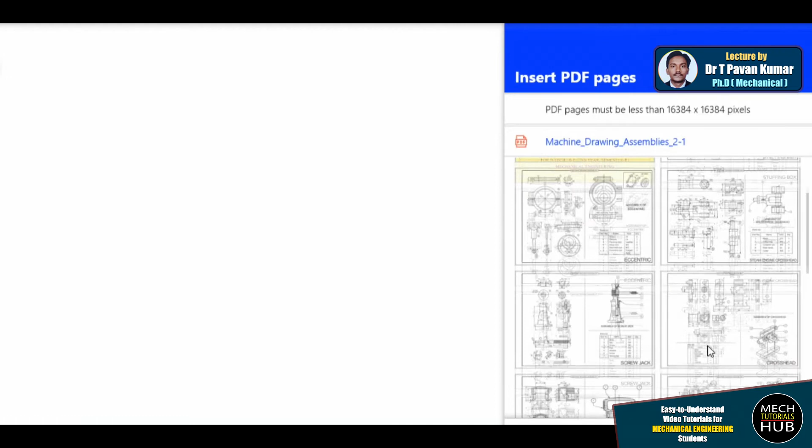Now let me quickly move on to revolving center. I'll take that question first. This is that question. We have already discussed, I have shown you the 3D representation of the model, and also how to accommodate the parts, or how to place the parts in its working position. All the discussion we had already.

Now here is your question. This is the question. Complete question will be given to you with all the representations and all the dimensions. You are supposed to assemble them. Part list table will also be given to you. Now where to start, how to start is a question. Today we'll discuss and focus on that.

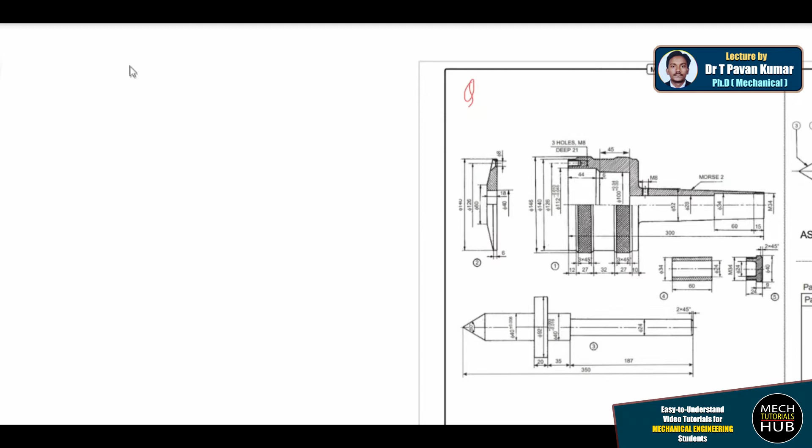Now let me tell you, whenever you start any assembly or any drawing, whether it is an assembly or an individual part, you are supposed to use 2H pencil all the time for construction. 2H pencil for construction. That is very much important to understand.

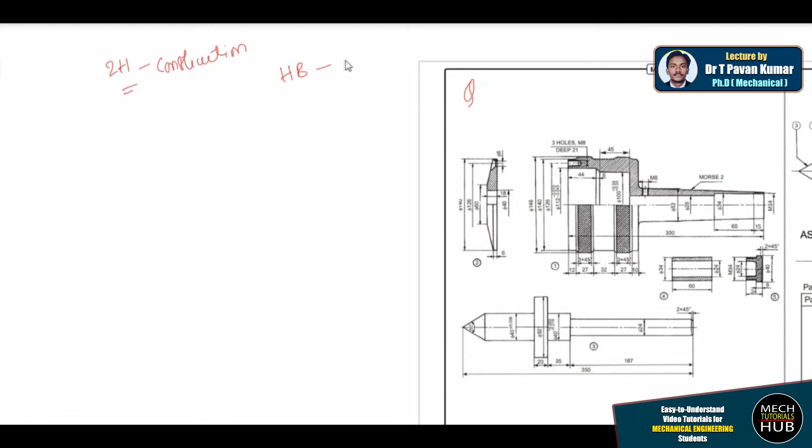Other than this, HB pencil is used to darken the outer profile or the visible portion. Only the visible portion you have to darken. To draw the continuous lines we use HB pencil, and complete construction, dimensions, everything we do with 2H pencil. That is what I'll show now.

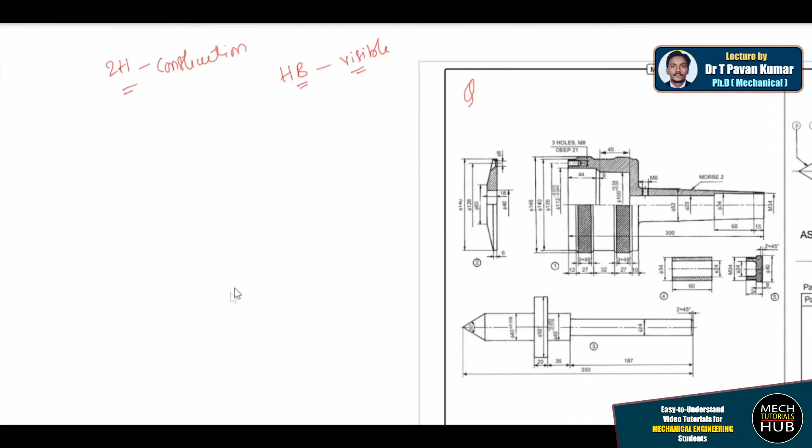Try to concentrate. Now let me consider this light color as the construction, and let me use a scale for this session. Two points are very much important. Number one, you have to consider whether the given assembly is symmetrical with respect to horizontal or with respect to vertical. These two things you have to keep in mind.

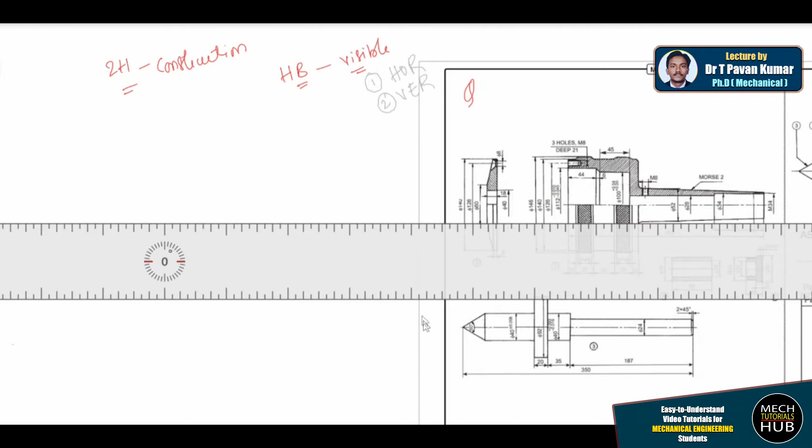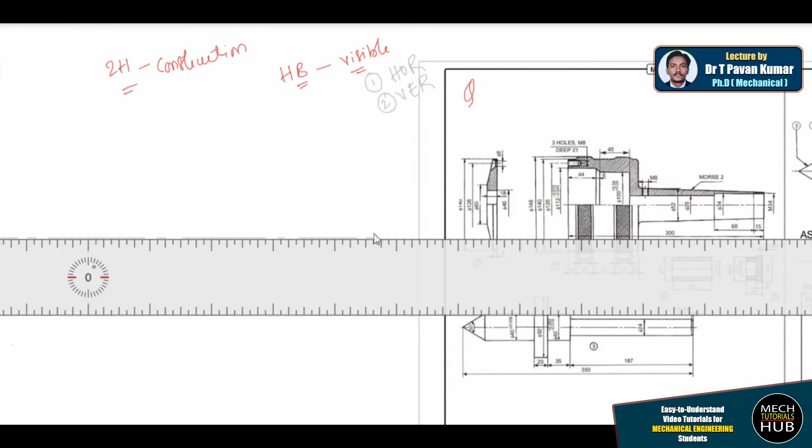Now this component is symmetrical with respect to horizontal, nothing but the top half is equivalent to the bottom half. So what I'll try to do is draw one axis line. I'll consider one axis line here where I just try to build the complete construction of revolving center. Alright, this is the axis line. Now to this axis line, whatever the axis line I have drawn, that is this particular axis line.

Centrally, now this is part number 1. The second thumb rule is, whatever the assembly may be, try to place part number 1 first on your drawing sheet, properly with all the given dimensions. Now to place this part number 1, let me read all the dimensions.

The overall length is 300 mm. Let me take this color. Overall length is 300 mm and having a minimum outer diameter of 34, here you could see, and a major diameter of 146. This 146 is from extreme end points, and there is one more diameter called 140, that is one more line parallel to that, and there is a circular hole of 8 mm diameter here, which is at a distance of 126.

Just go through the sketch properly. I just consider outer dimensions. Length is 300, 34 is the minimum dia, 146 is the major dia, and there is one more width here, because this 34 is not maintained throughout. There is one more diameter which is 52. There is a taper here from 52 to 34. I'll show you how to draw each and every bit of it.

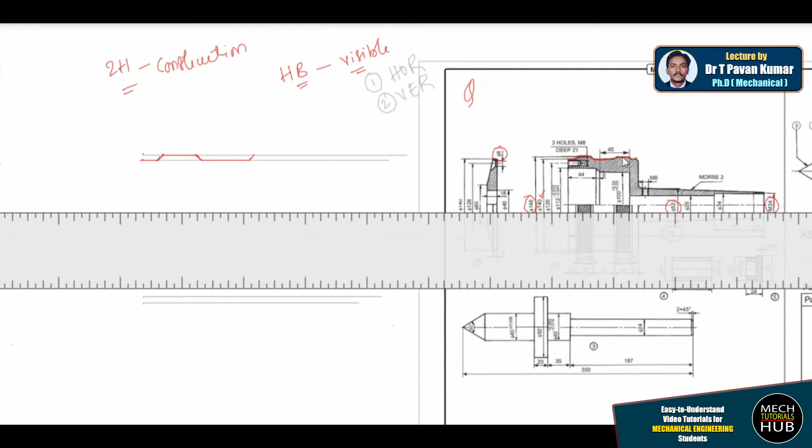And here 45 degrees. Again I'll go with one more distance. This is again 27. Let me place the scale here. This length should be equal to this length, and now 45 degrees to the below side, bottom.

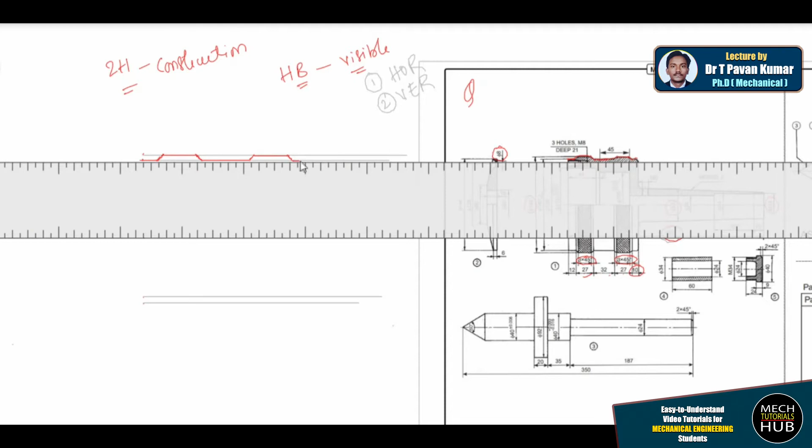This is fine. Again there is a horizontal of 10 mm, that I'll try to draw. This is 10. Alright, now the same profile will be followed to the other side.

For that, you have to make proper use of construction pencil. Now I'll just make this scale vertical. Only this particular part number 1 will take enough time. Other parts will take very less time. Try to concentrate, we have only 7 minutes time for the session.

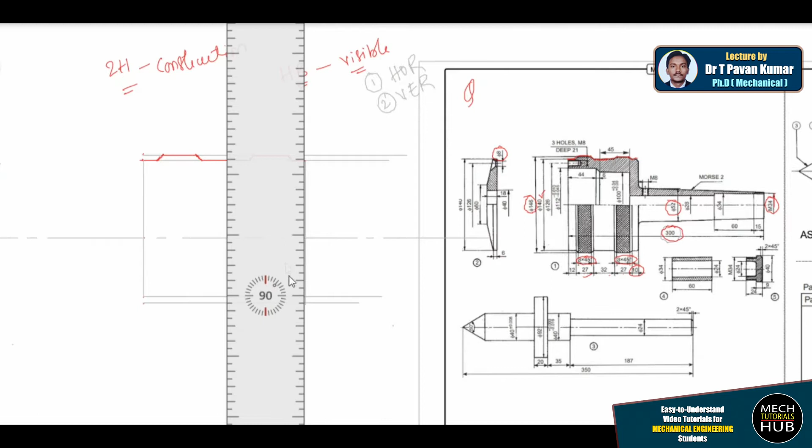Please try to rejoin. Now the part will start here. Wherever the part is going to start, there I am going to draw a vertical, and wherever it is going to end, there again I'll try to draw one more vertical. This complete width is going to fall in between these two verticals.

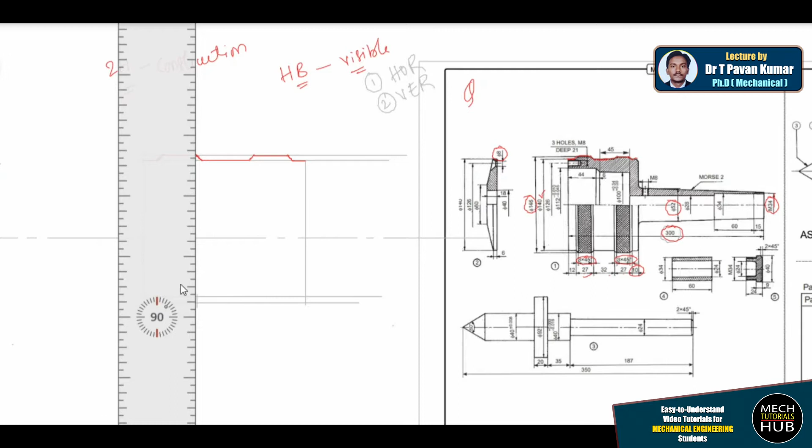Again same story, where I just need to draw the profile here to the bottom side also. For that, no need to draw the same process again, I just take the intersections. Here is one more, here is one more intersection, because these intersections will help you develop the sketch properly. No need to measure, simply take the intersections and you can easily develop the model, because ultimately I need to get that profile.

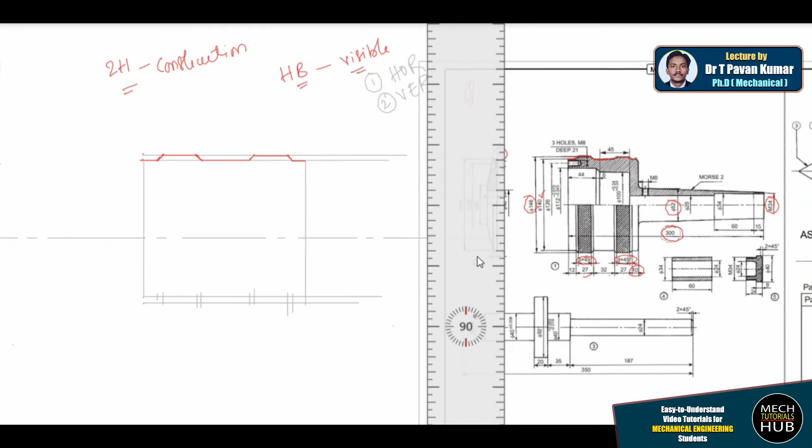And rotate the scale, keep it horizontal at 0 degrees. Now simply, wherever 45 degrees is required, there I'll try to put the 45. This red color one is nothing but your HB pencil. This is 45, this is also 45, 45 degrees, 45 degrees. Now in between I just need to darken the lines.

12, 27 lines, this is 32 line. Whatever the profile maintained above, same is going to be maintained here also. If you do the proper markings, then it becomes very simple. Whatever the profile made above, same thing I did here also, I got it. Now outer thing is fine.

Let the construction lines remain the same, or else if you feel some clumsiness, you can remove it. That is also okay, not at all a problem. Whenever you want, you can remove it. If it remains also, doesn't matter.

Now this is done. Now internally, if you could see, there is a profile followed. This is a horizontal 45, horizontal, then again a vertical line till the axis. So that I'll try to draw now.

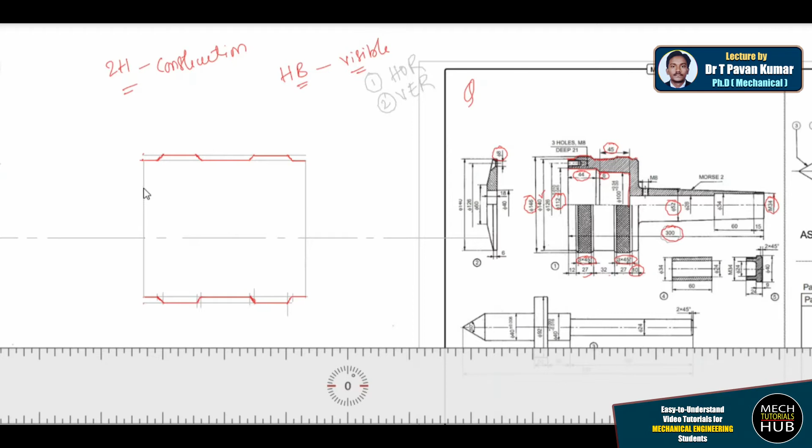Okay, from here I'll just need to draw a length of 44, which should cross this inclination. Keeping that in mind, I'm doing it.

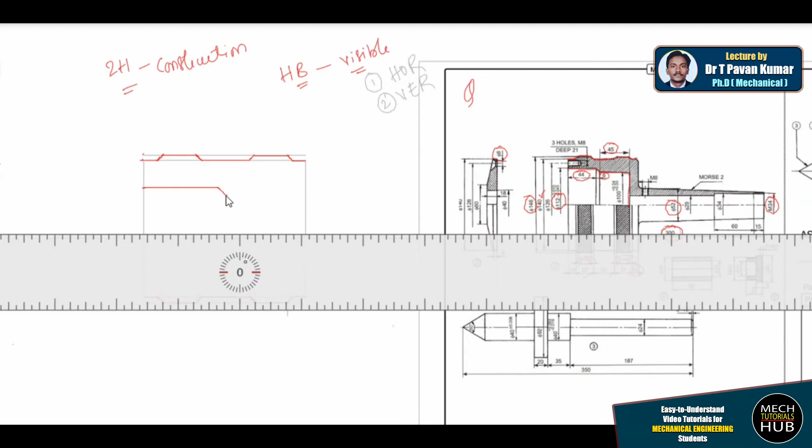This is 44. After that 44, there is a 6 mm gap. From this point I just need to make a mark of 6 mm and draw an inclination, 45 degrees inclination. From that 45 degree inclination, there is one more line of 45. From here I just need to draw that 45 line.

Till here it is fine. I just need to drop this line. We have to drop the line till the axis.

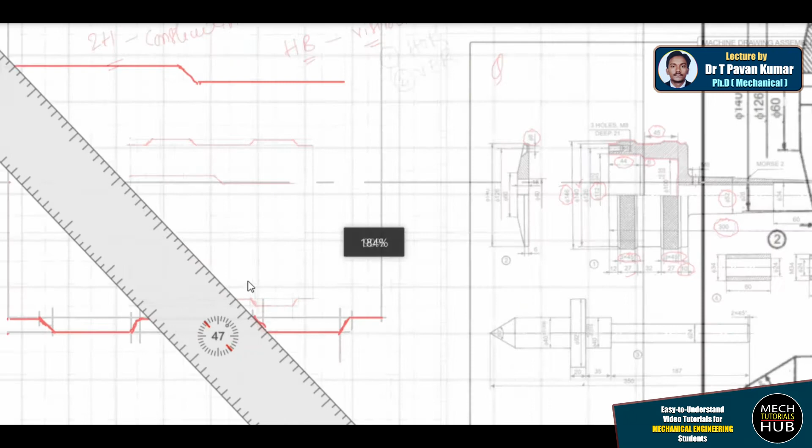Just have patience, I have enlarged this scale. Let me reduce further. Okay, now I'll try to make it 90 scale and place it here. Now have a look, I'm trying to get this line till this axis.

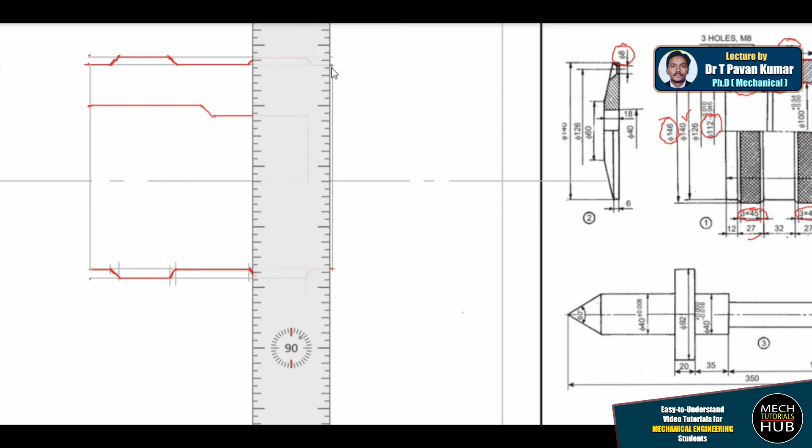I'll try to close this line also, since I already drew the vertical. This is also visible, so I'm making it dark. Till here it is fine. Okay, let me reduce the size.

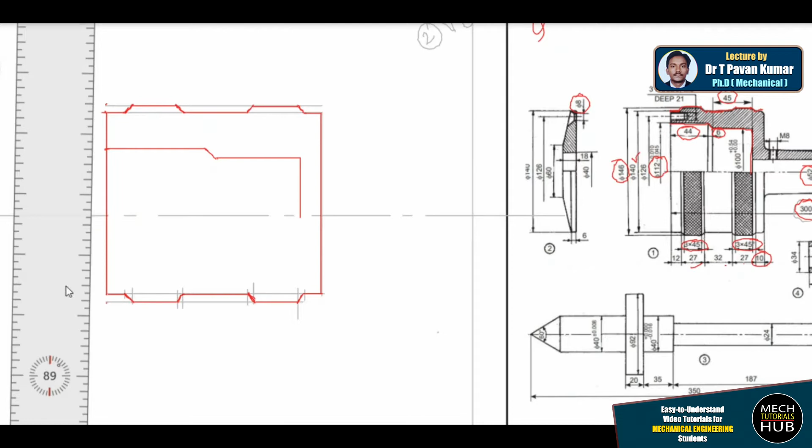So that I can show you in a better way.

Alright, now what exactly we need to do? Hatching part, now internal features you can mark. There is a centrally drilled hole here, which is at a distance of 126 from end to end.

From the center, if I consider 126 divided by 2, that's 63. So from the center I'll make a mark of 63, and there I'll place a hole of 8 mm diameter. So from the marking, 4 mm on either side.

Let me change the color. This is 4 mm and deep of 21, with this shape. There is a hole here, because this hole will help you clamp the cover, which is part number 2.

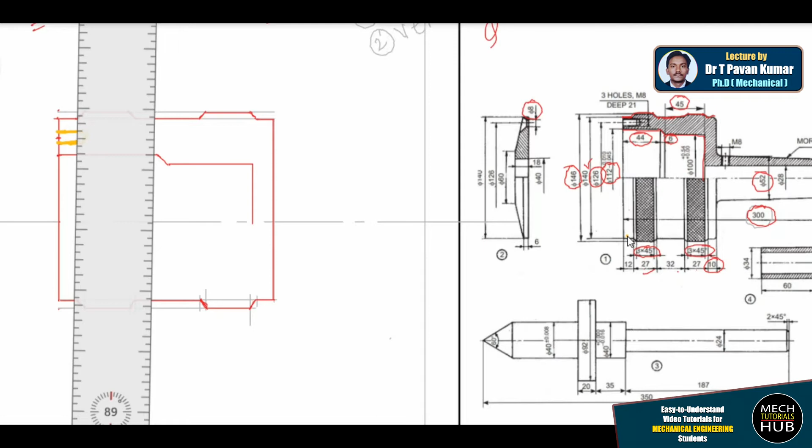Here, let me show you. Here you could see it is maintaining a diameter of 52.

Let me erase a few things and show you. Already these things I'll erase just to take off the clumsiness, and let me show you here. The diameter maintained is 52, and outer it is 34, and internally also there is 34 by 60.

Okay, and I just need to construct the leading edge of the barrel. That is also important. Let me do this by considering, because here there is a taper section from 52 to 34.

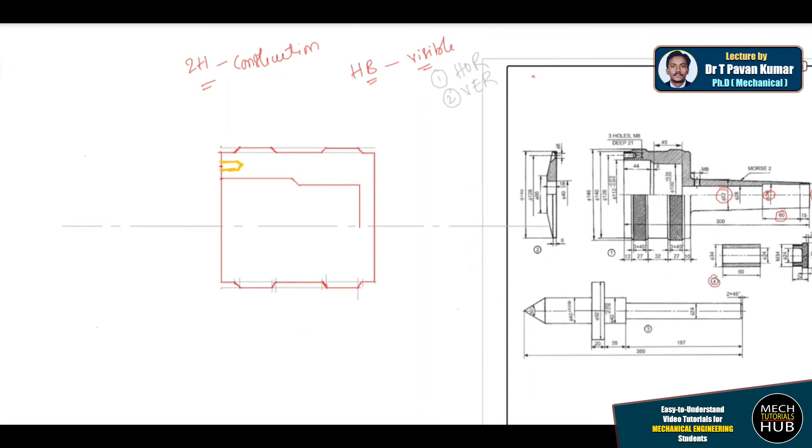Let me erase these unwanted things which I have explained you earlier, so that you could see the clarity of whatever construction we made.

Initially constructing with 2H pencil is very important. Try to understand, now what I'm trying to do, internal features, intricate shapes, that you can do just by looking at this hatching part. We need to maintain an angle of 45 degrees with an offset distance of 2 mm. That clarity you already have.

We'll see if time permits. Now I'm trying to draw this leading edge of the barrel, which is maintaining diameter of 52 here and outer diameter of 34.

And what is the length that we need to calculate? Length is also important. Overall length is 300 mm.

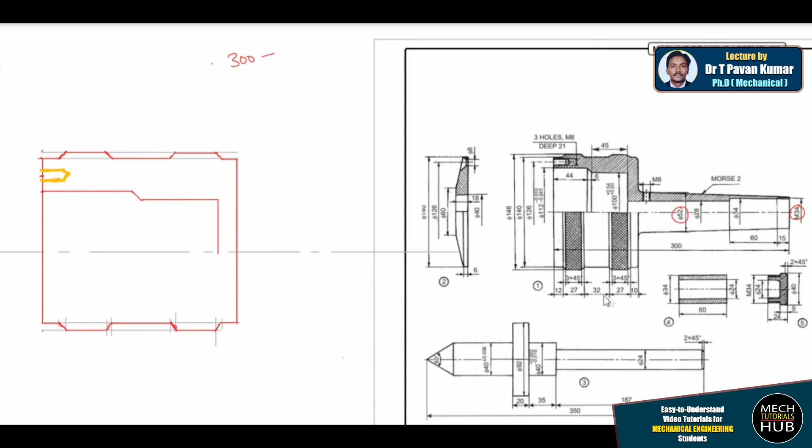Overall length is maintained as 300 minus this, which we have already constructed, that is 12 plus 27 plus 32 plus 27 plus 10, which is 108. I am going to subtract this 108 from 300, which gives you 192. That means from this vertical till the end it is maintaining 192 mm.

Okay, so now I need to construct that 192 here. So let me use these dimensions, 52. I make a mark of 52 from here, from this center. I need to split that 52 into 2, that's 26.

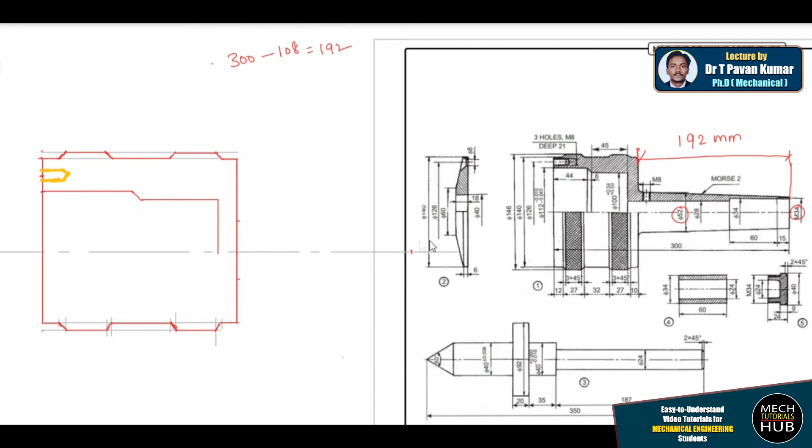So here, 26 on either side. Now I'll measure a distance of 192 from this point, till this point, 192. Alright, 190, or else better what I do is I'll just try to move. The whole thing is moving now.

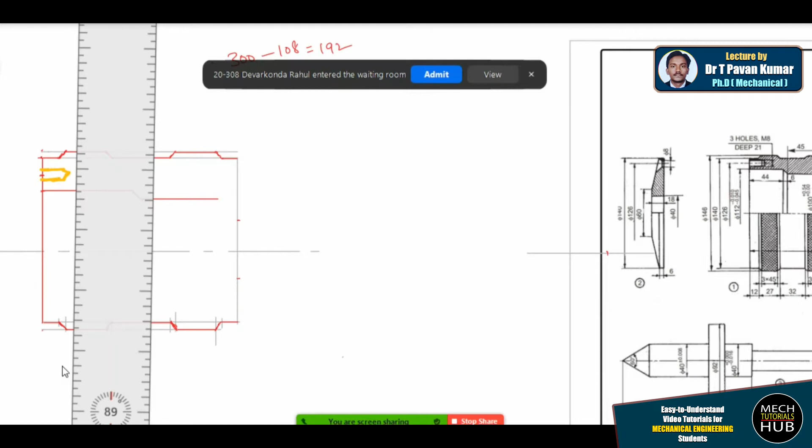Alright, I'll just try to redraw again so you'll get clarity, because the space available there is very less. So I have shifted the question back to its position, and I'll try to make it horizontal.

Let me draw the construction first by taking 2H color. I am increasing the axis length. This is done. Again I'll just try to make it vertical.

Then already we made marking of the 52. Let me change the color and draw. This is fine, and here there is one more line that needs to be extended. This is also okay. Now the 24 is done.

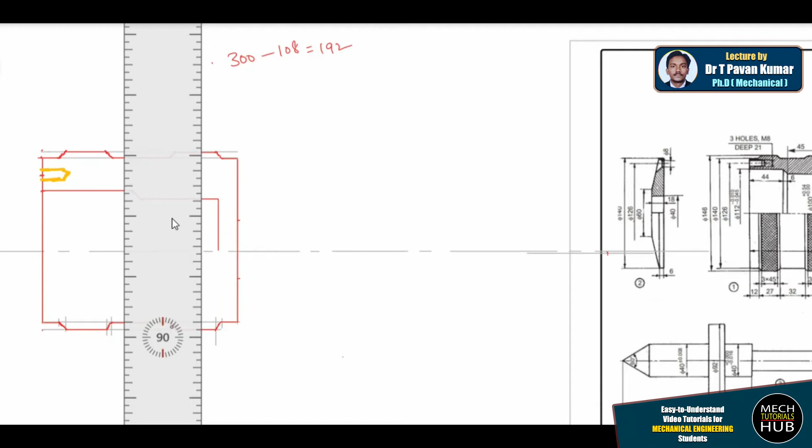Now I need to make a mark of 192, because 300 minus 108. 108 is already constructed, so I am subtracting to get this particular length. Let me consider this length and make a mark here. I'll consider this marking as 192.

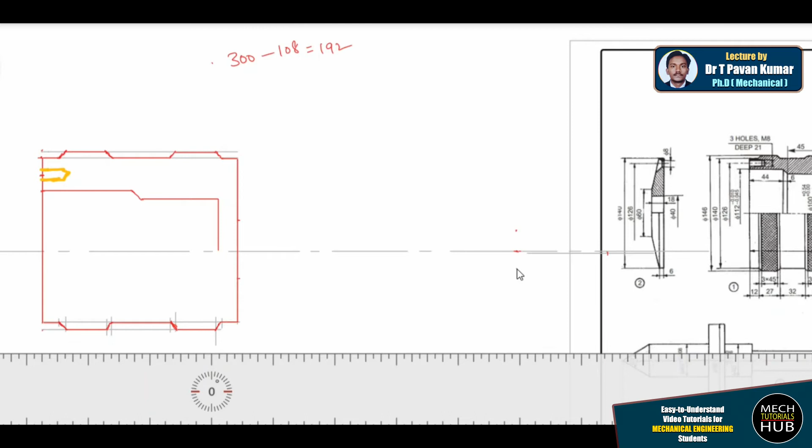Now here at 192 we need to place 34, which is 17. Sorry, from here I'll just make a mark of 17 on either side, this point and this point. Let us consider from this point to this point as 34. Now let me join those two with this scale.

Let me align this point, the 52 point and the 34 point. I am aligning those two, and let me draw a continuous line, a taper line you are going to get. Similarly to the other side, do the same practice. Rotate it down

to 2 degrees - not 2 degrees, but you have to cross check. Okay, here I am getting it as 2. Done. Alright, now here it is maintaining 52, here it is 34, and what I try here is I'll try to make join the vertical.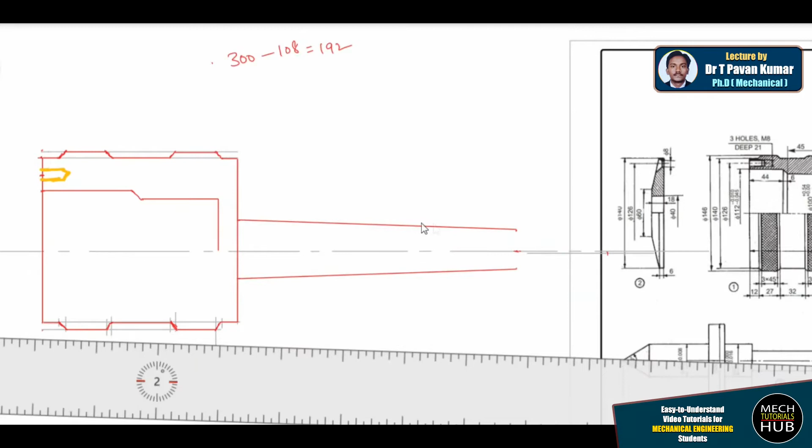Let me make the scale to 90 degrees and join. Alright, this is how the construction is.

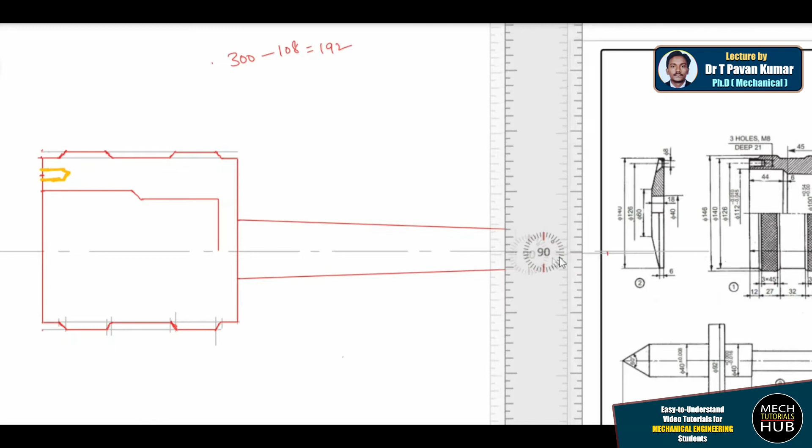Let me read other dimensions of the given question. Now here you could see other dimensions, meaning 60 and 34 are justified. Now this 34 has to be placed here internally. This hatching represents that there is material, solid material, and internally after hatching you find a hole.

What is the hole diameter? That is 28. So the 28 material addition you are supposed to show up to this distance. Up to what distance? From the extreme end point at a distance of 60 plus 15, which is 75. There is a material addition till this point, which is of 28 diameter, so it is 14 that you are supposed to show.

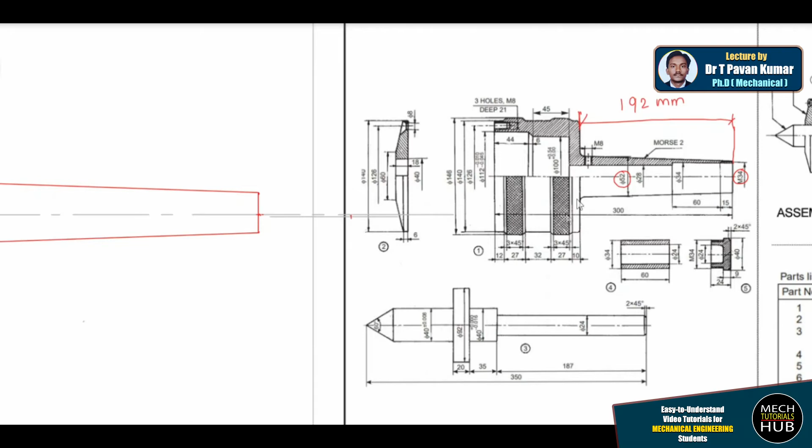I'll just try to make a mark of 14, wait a minute, let me enlarge the area. Okay, now here I'll try to make a mark of 14 from the center, somewhere here.

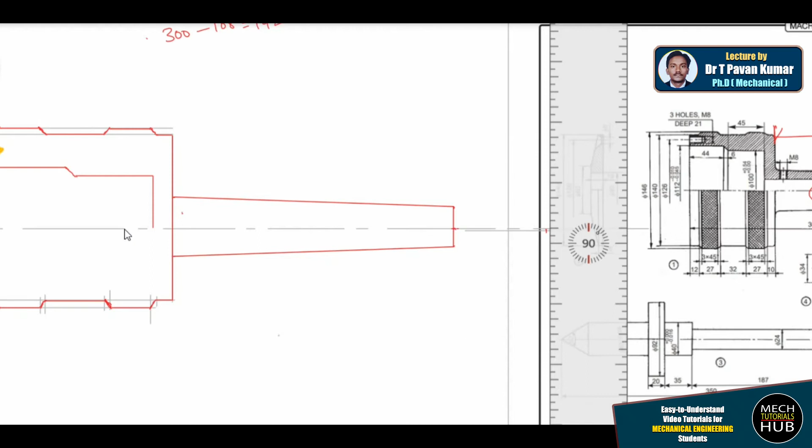Alright, now I'll consider a scale again to draw a line which is exactly parallel to the axis, because these two lines are inclined. Now I'll just try to place it here, and I'll try to draw a line from this point.

Up to what distance? From here we need to measure 60 plus 15. From here 60 plus 15, maybe somewhere. I just try to make a mark here.

I'll close it, because from this point there will be a step going upside. Let me draw it again, something like this. There will be a step going to come, because this is 34, this is 34, and the diameter of part number 4 - let me cross check the diameter of part number 4.

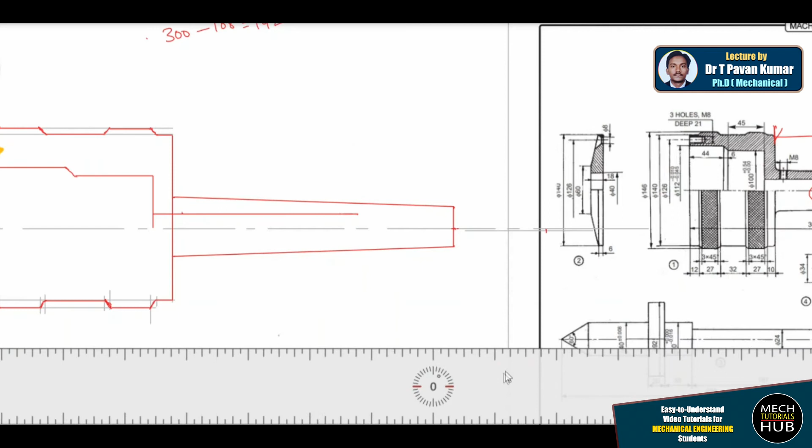Alright, let me see those dimensions. Here, have a look, it is maintaining 34. The outer is also 34, meaning the step is going to match with that particular outer diameter of 34.

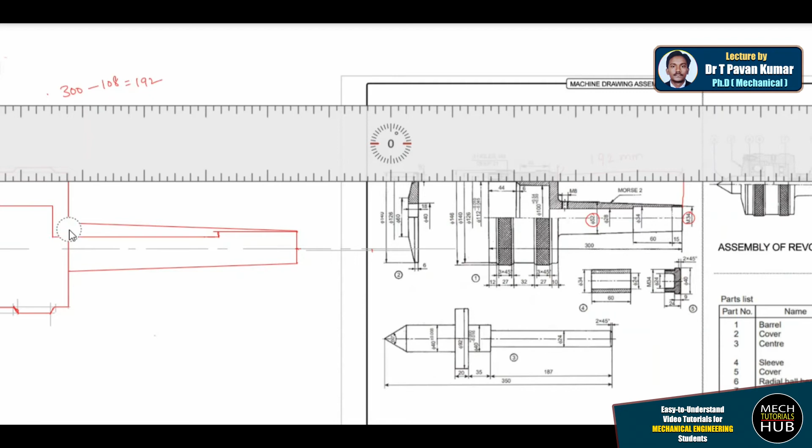So for that, what I do is get a scale again. I'll try to place it exactly at the corner and draw the line, and that line should come and match up to this point. This leading edge you can erase, and I'll try to take an eraser and remove this line, and here also you have to draw a few extensions properly.

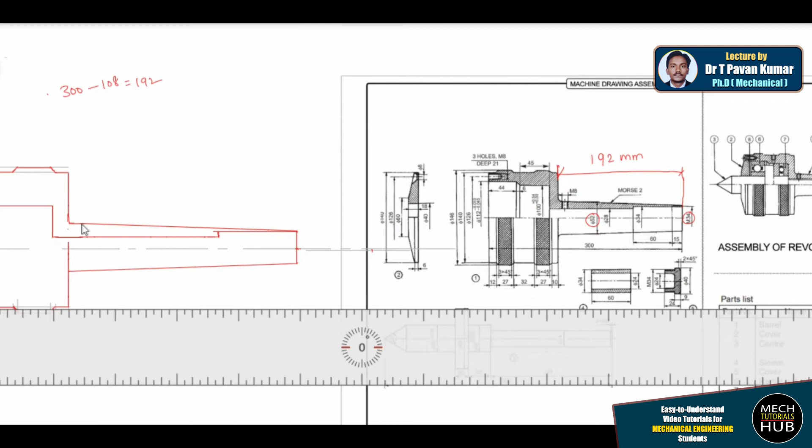Here there is a line, and this vertical should travel down, and there should be an inclination. This is how it is going to be. Have a look. And the portion, this gap you have to fill with some hatching, because this is an indication that it is a solid material. Alright, I hope it is clear till here.

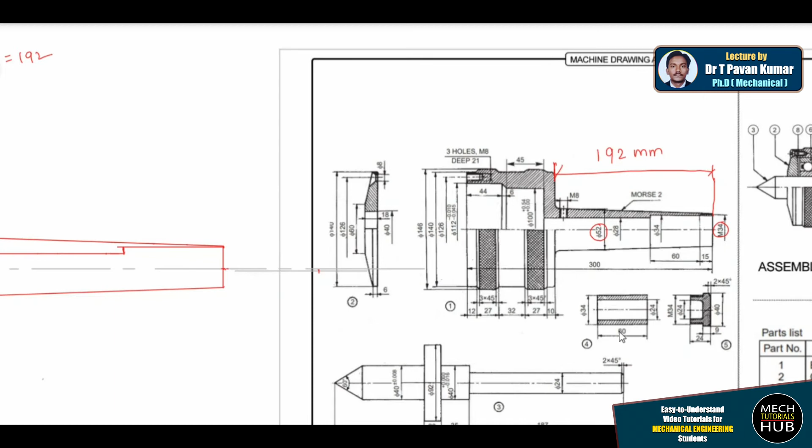Now after drawing the main body of part number 1, other things become so simple. Now let me concentrate on part number 4, which is 60 by 34 and having an internal hole of 24. This can accommodate here 60 34, 60 34, both are matching. So I just try to pull this part number 4 from right side.

Okay, let me consider some other color for that. I'll just take yellow color, and let me draw that. So 34, from here let me consider that as up to 60. Alright, same thing, I'll try to put it, I'll just try to put here also.

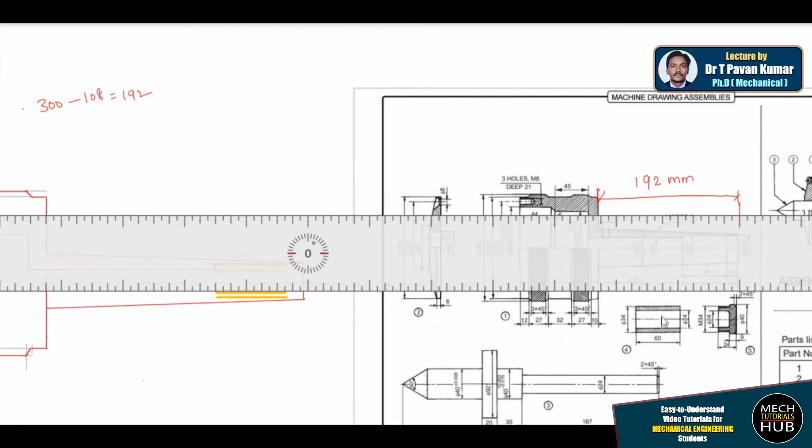Okay, now rotate. Now internally there is what you call hole of 24, so I'll try to draw double line here. Similarly, I'll try to draw double line here also, because this double line indicate that there is a central hole of diameter 24, which you could see here, central hole of diameter 24. So on either side there is a material, so wherever you find a material, there you are supposed to hatch.

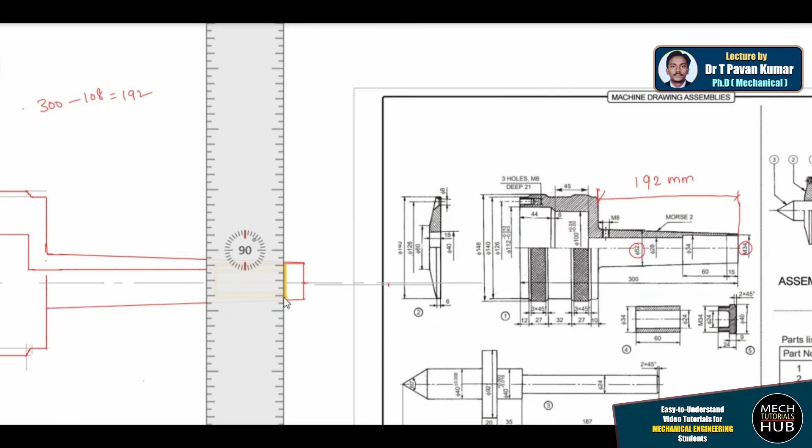Okay, so here I'll just make it 90, and I'll try to make use of the scale to draw the verticals. Here there is a vertical, here there is one more. Okay, and this portion you are supposed to hatch. Okay, same pattern you have to fill to the other side also, because it is the same component.

Alright, in this 24, this center, this 24, this shaft will insert. I'll show you how that will insert. And one more point to be noted, when I pull this part number 4 from the right, it will be restricted here because there is a step. Okay, same step you find to the other side also, but that is not visible because cut section is made only to the top side. Okay, to other side there is no cut section, so that is not visible, and in a hidden pattern you could see that.

Alright, and I'll just erase this one. This line should be extended up to the axis. Alright, up to axis only, because after axis there is a cut section that you have to show.

Now going back to part number 5, which is maintaining an external diameter of 40. Here internal diameter is 34, here also 34, so this part will insert and this will remain outside. That is very clear. And there is a provision here, there is a provision that only 15 mm is possible to insert. So here, but here it is 24.

Out of 24, 9 mm is maintaining a diameter of 40, so 24 minus 9 will give you 15 mm. So this portion will insert completely inside, which is 15. This 15 and this 15 both are matching with each other, so I'll take this part and pull it inside. Okay, and this 34 is matching with this 34.

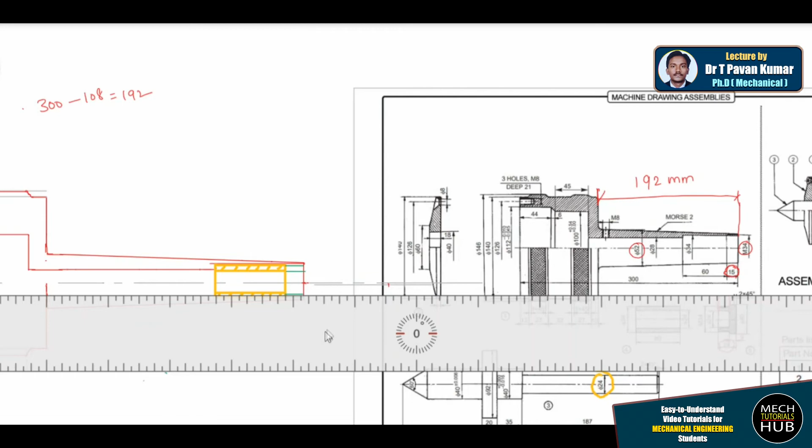This is what 15 and this is also 15. Similarly here also 15 and 15. This part is inserted, green color one. Alright, then rest 40 dia will stay out because there won't be any chance to go inside, so that I'll try to make it now.

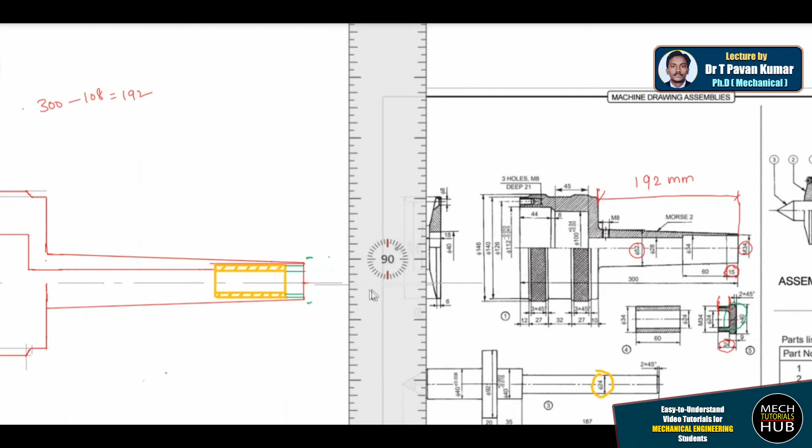So here this portion, I'm talking about this portion, have a look, it is 40, so from the center I'll make it 20. Now here what I'll try to do is, I'll try to join this line. Something like this. This will remain out. Okay, and even I just have to darken this line also.

Okay, so now this is complete one part. Try to understand where I'm trying to make hatching. Likewise, okay, now this 24 is maintained throughout from part number 4 and 5 also.

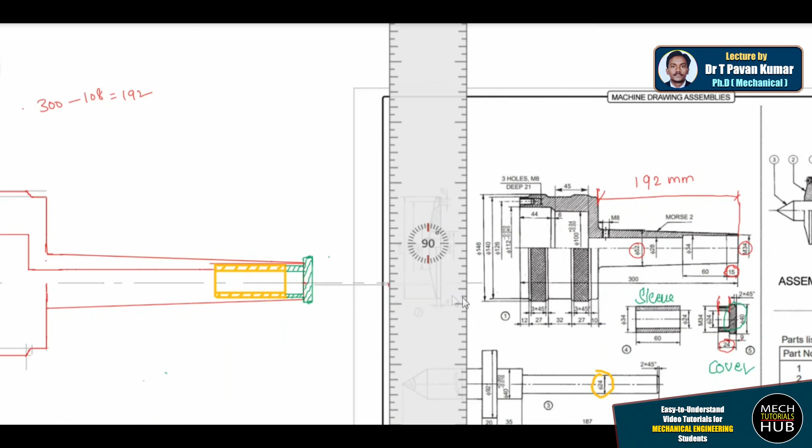Alright, now a barrel is done. From the back side I have fixed the cover also. This we call it as a cover, this as a sleeve, this part 4 as sleeve. This I have fixed, and the cover I have fixed from the back. This is done. So what else remaining, we'll see.

Okay, now I have to place the center. Center means this one, which is of 350 length. Okay, so 350 length. Overall barrel is maintaining a dimension of 300 and this is maintaining 350, so it is very clear that 50 mm will come outside. But one more thing you have to consider, here there is a material addition, and here the diameter maintained is 52.

This vertical will start at this point and end up somewhere. That you should calculate. Okay, how to calculate now?

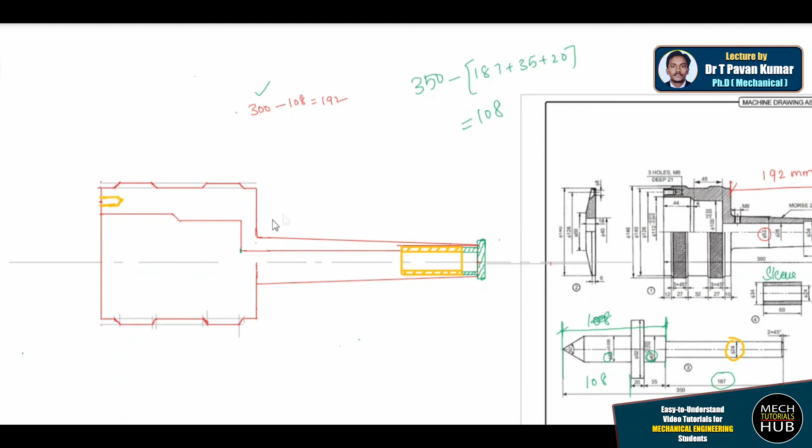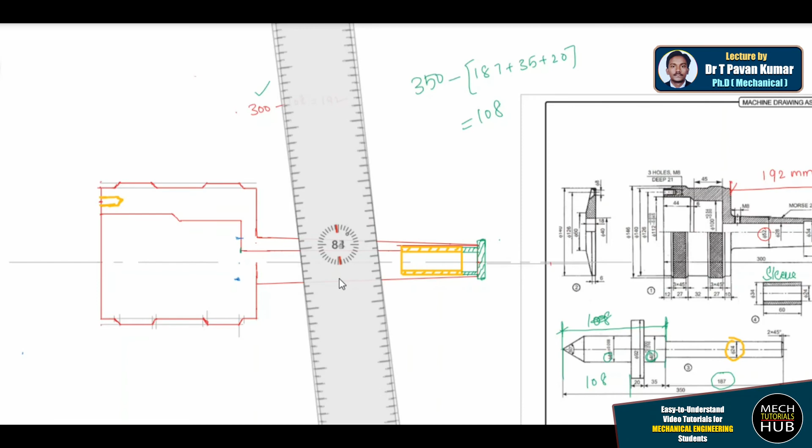So I'll just try to make a mark of 40 here. 40 will be restricted here, maybe this is from here to this point. I'll just make it as 40. Alright, now I'll just rotate the scale to 0 degrees. I'll make it horizontal.

And let me use a construction pencil which is 2H to draw the locus. This is one locus and this is another. This is fine. Okay, till here it is okay.

And this 40 is maintained up to 35. I'll just make a mark of 35. From here I'll make a mark of 35 somewhere, maybe here. Okay, I'll make a mark of 35.

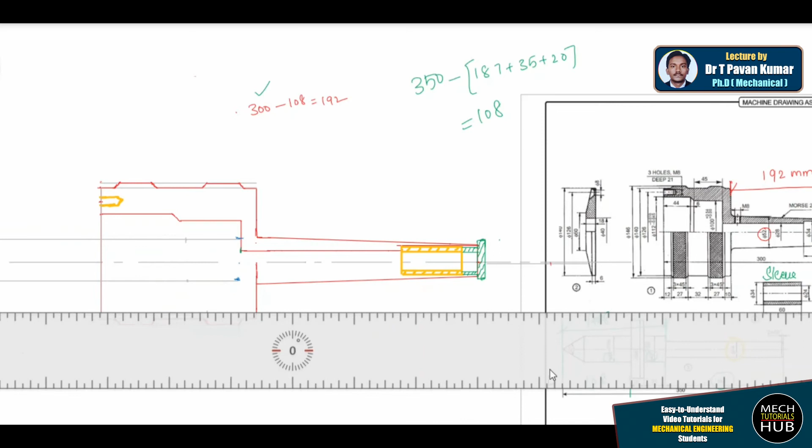From that 35 there is one more diameter of 92 which is maintaining a width of 20. So I'll maintain that width of 20 also here. 20, I got a marking. Okay, after that 20 there is a distance of 108. From here I'll make a mark of 108 somewhere here, let us say. Means this particular center should end up here.

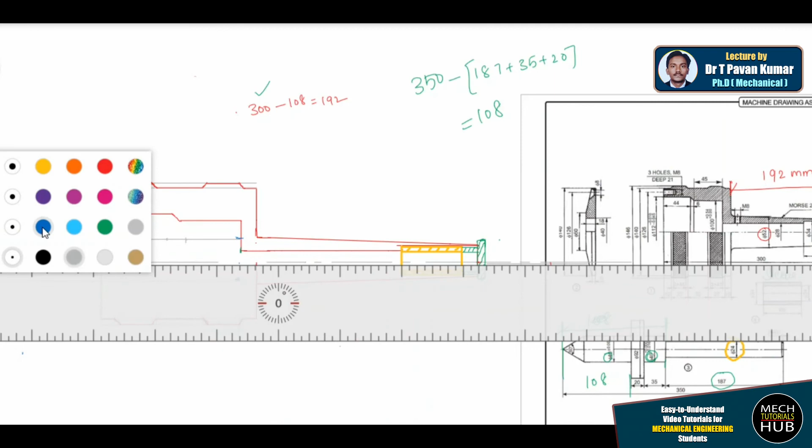Okay, now I'll just try to darken the areas which are required with blue color. Now this is the area which is visible. Actually the complete center will go inside. You are supposed to make it hidden, but just to make you understand, I'm making it dark till here. After that from here it is again visible up to some point.

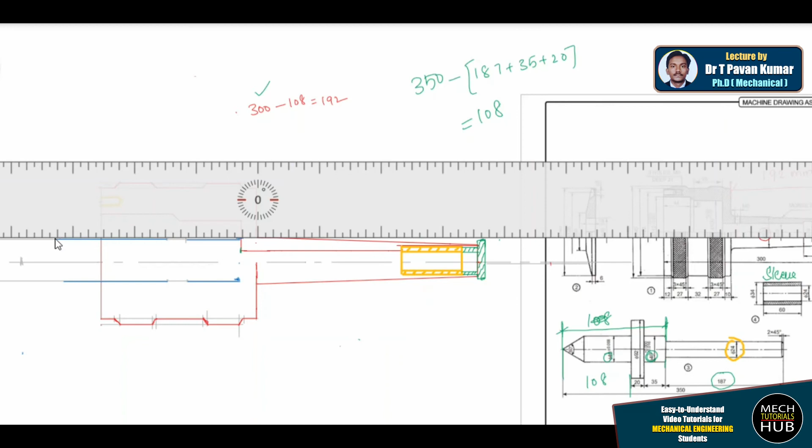After that you have an included angle. From here it is visible till this point, till this point. Okay, and from here you just need to draw a 60 degrees line. Okay, similarly to the other side, you just need to draw a 60 degrees line. There ends the matter. Okay, something like this you need to draw. This is 60 included angle.

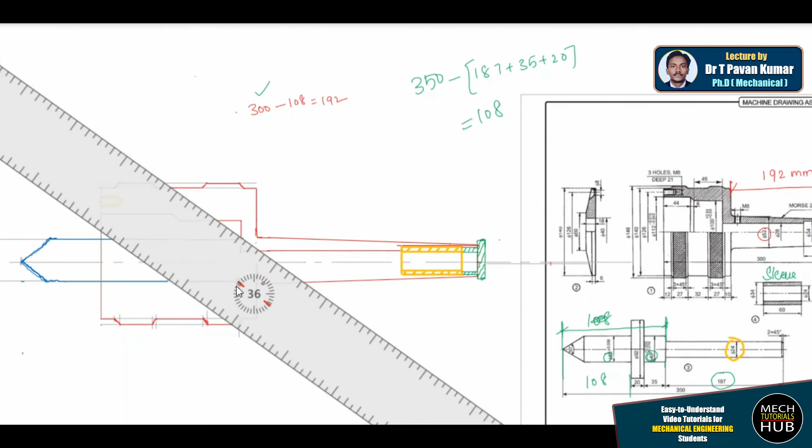This is done. Let me rotate the scale again to vertical. Just let me make it 90 degrees, so that we can close this particular center component. Now here, as I have placed, I can close this portion. Alright, and I need to draw this 92 from here to here. Let me say 92, and it is maintaining a width of 20.

So this is that width, and let me join these two with the scale actually, but I just make it with freehand. Okay, this whole portion, once it got entered into barrel, will become invisible actually, but for our understanding I am making it dark. At the end I'll show you, I'll tell you how exactly you need to show hidden line and all.

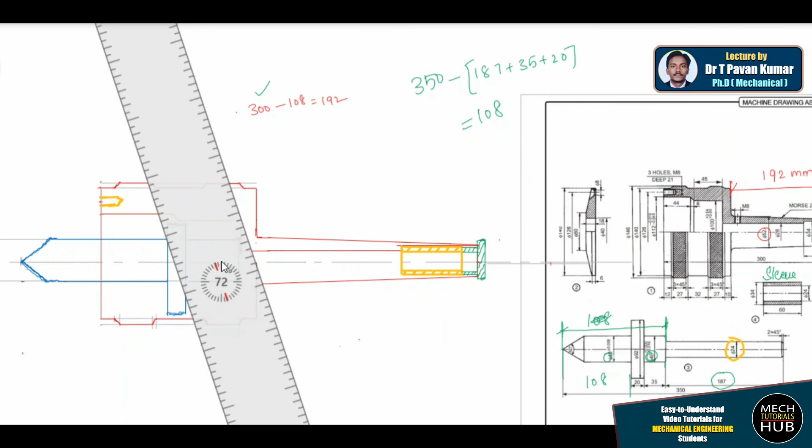Now rest of the part I need to draw, which is maintaining 24 dia up to a distance of 187. So I just need to make a mark of 187 from this line. If I measure 187, that will travel up to this point. So from this axis, 24 means 12 mm. I'll make it 12 and draw the line till this particular point. Similarly, I'll do the same to the other side. This is 24 line and it will close here at this point.

Okay, the center got inserted. Till here it is fine, everything is done. But once the center is inserted into the barrel, you have to fix it. It should not come out again. So for that there is one more cover given here, which is maintaining a width of 6 on either sides.

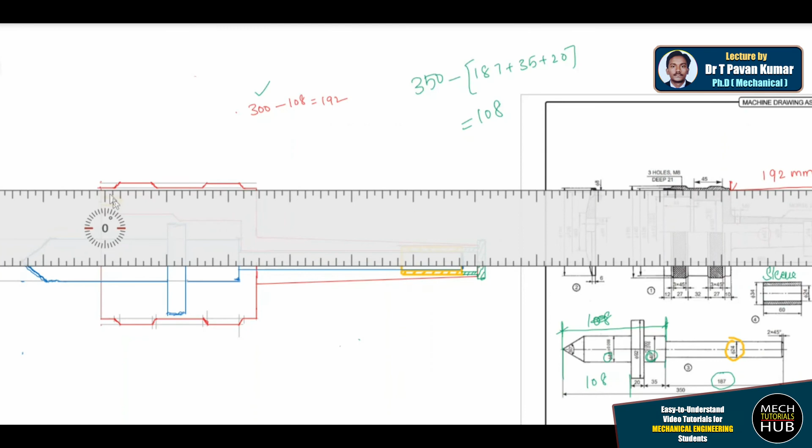For that, let me change the color to black again. Here there is a cover I'm placing. From here I'll maintain 6. To the other side also I'll maintain 6. This is fine. Now this shape, we need to get this shape. In the middle it is maintaining a width of 18. So from here I'll just make a mark of 18 somewhere here.

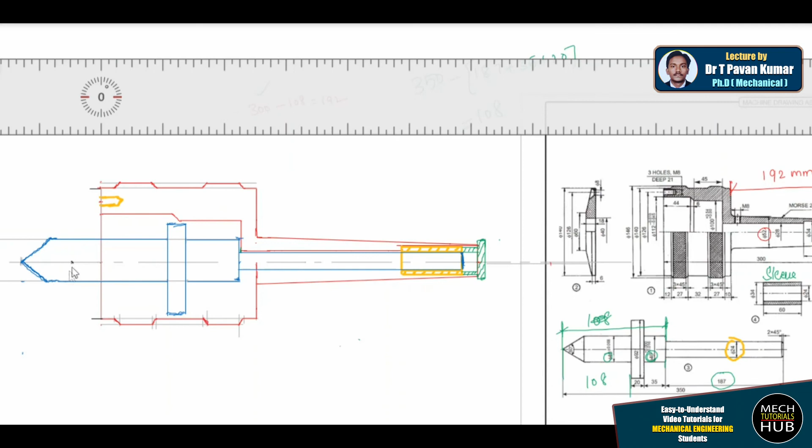Okay, now wherever it is maintaining 18, it is maintaining a diameter of 40 there. So this shaft is also maintaining 40. So it becomes easy for us now. No need to make any marking. Simply join with a vertical.

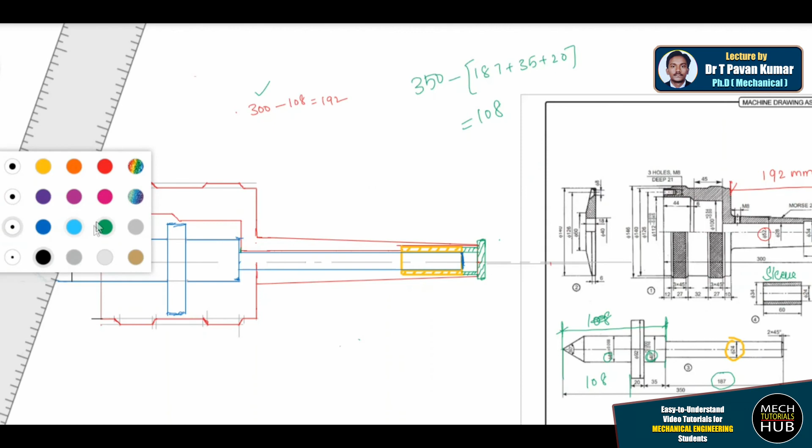Make it 90, and with the help of scale you can just join it. From here it will travel this way, so align your scale in such a way that you can align with both, something like this. Or else, if you want, you can increase the thickness also, something like this.

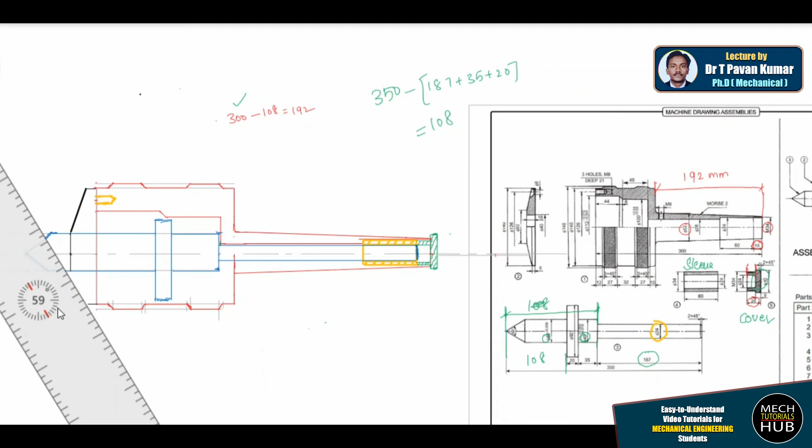And do the same for the other side also. I'm trying to align here. Have a look, let me increase the size and show you, so that you have clarity.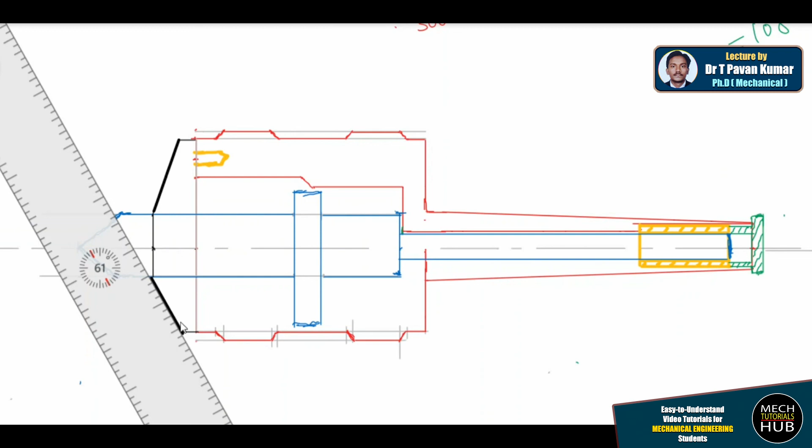Here I just need to use an HB pencil, just to darken. Now let me draw a line something like this, and all required things I just need to darken with scale. Let me make it vertical. Now everything is done, all the parts placed in its working position.

Internal features you just try to understand and do the practice, because if I try to draw the internal features also, it will take enough time. This I just need to make it dark. Now in this case also I'll consider dark color. Let me darken all the required things.

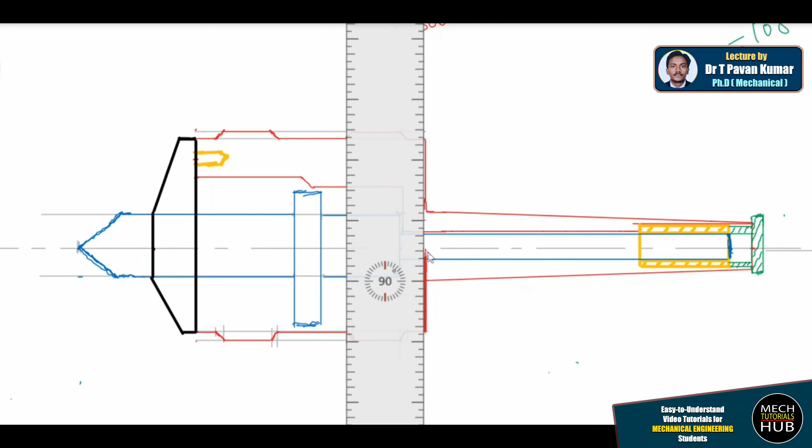This is visible, this is also visible, so all visible things I'll just try to make it dark. Similarly I'll consider blue here.

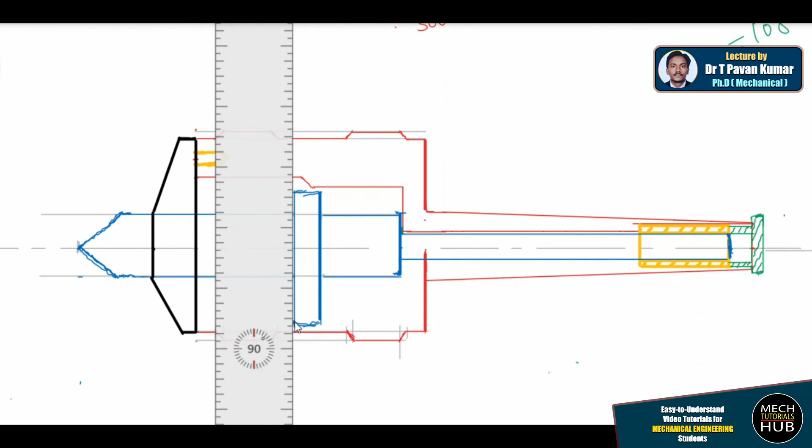This is actually not visible, but still I'm showing you. You're supposed to make it hidden line, because the complete thing is internal. You have to make it hidden, dotted line, what you call. Okay, till here it is fine.

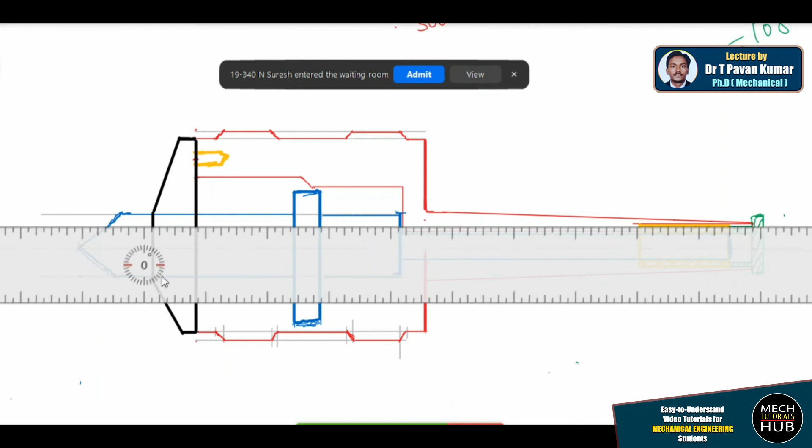Let me make the scale horizontal and do the required things. Now after completing the assembly, complete front view, you are supposed to draw the side view of the component. That is one more important point. Other than side view, you have to give all the dimensions. That is very important. Have a look.

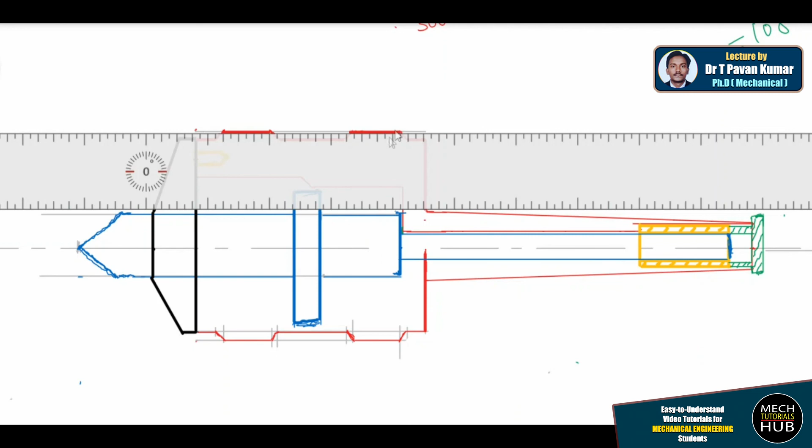I'm trying to darken, this is visible, this is also. After drawing the visible things properly, you will get the effect, the proper elevation. Every darkening has to be done by using HB pencil.

Visible, all visible things I am trying to make it dark. Have a look. This is very, very important to understand. And here, 45 degrees.

I'll try to manage with freehand, but you people need to use scale. This is how you need to do it. Similarly this line, everything, whichever is visible.

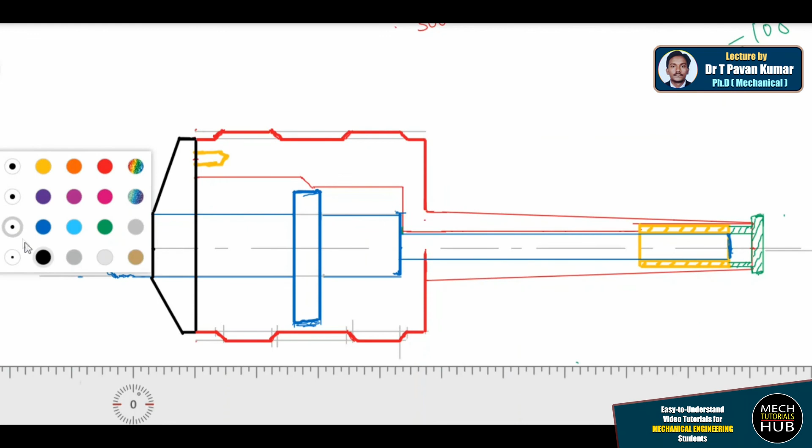Outer profile has to be darkened. Internally this profile should actually be different. Like I'll show you by using this black dark color so that you'll understand. Here the center is completely inserted into the barrel.

Wherever it got inserted, this portion is visible to us, and after this it becomes completely invisible. So you're supposed to make it invisible, something like this. Just to make you understand, I'll try to draw a line parallel to it, beside it.

All these, this is how you need to show. This line, this line, okay, till this point. This is how you need to represent. Even this yellow color part number 4, this we call a leader line.

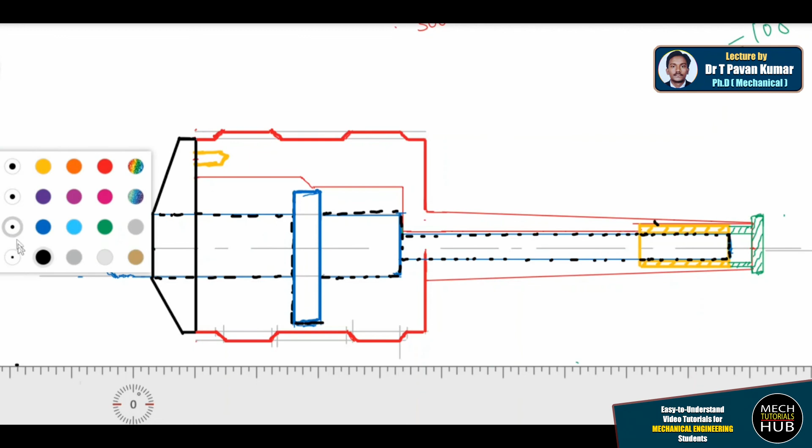Let me change the thickness. Here I'll consider thickness. Here you are supposed to give an arrow, fill the arrow, draw the line. This is called a leader line, part number 4, with a balloon. Similarly to the other parts, give all the dimensions.

Now we are running out of time. Try to understand, this is how you need to draw and give the dimensions, followed by this will be extended. There will be a screw. Give all the part numbers, dimensions, and draw the side view.

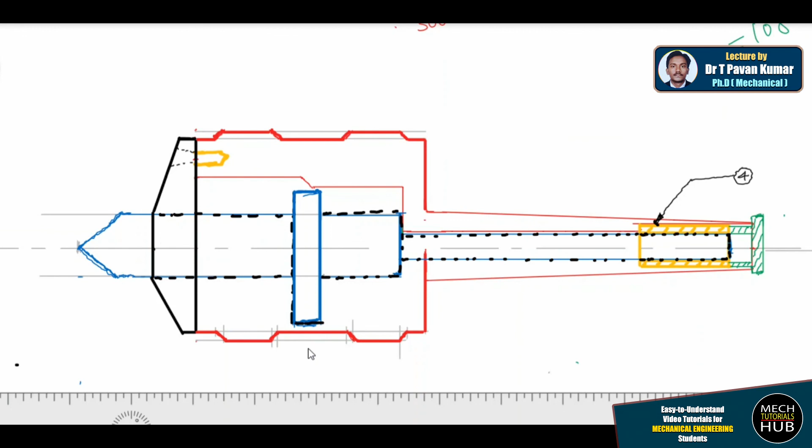When I view the component from the right, you could see all the circles. 40 mm is visible, this is visible, 146, 140. So keeping all in mind, I'll just try to do it fast.

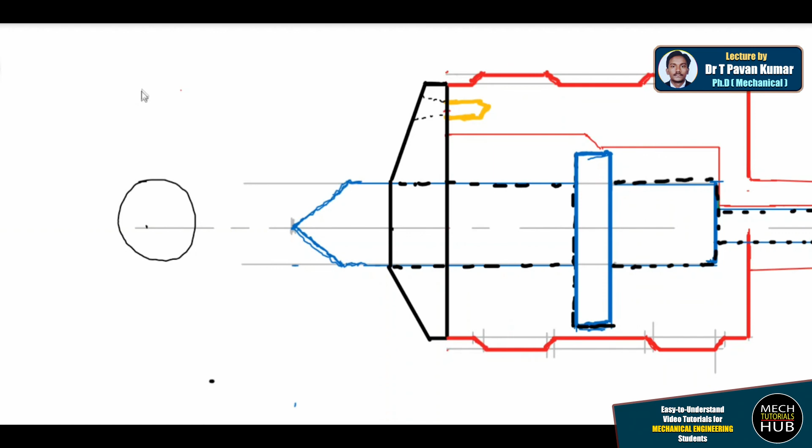What I'll try is, here, what you could see is all circles at some offset distance. This is 40 dia, visible to us. 146, take the locuses and draw. 146 is visible, I'll just try to draw a semicircle, and 140 is visible.

Similarly, a few things are not visible: 24, 34. Okay, all visible, invisible things, try to make it. And let me draw a vertical axis. This is about the side view.

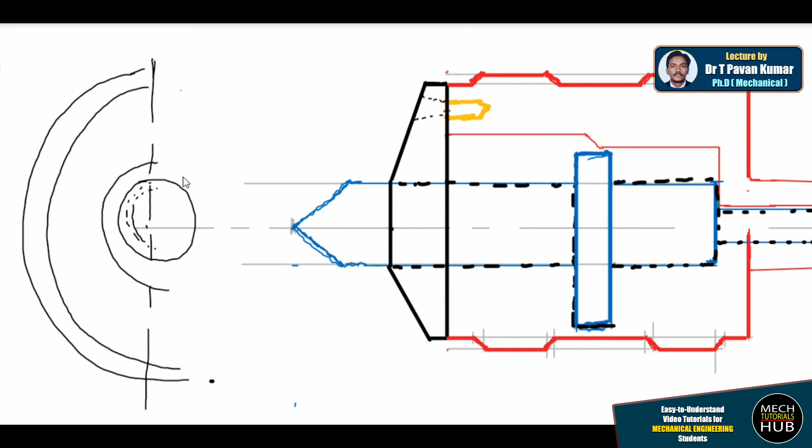I'm supposed to draw the complete circle, but due to time constraint, I just kept it half. Try to understand, this is how you need to draw in your sheet. Okay, this is about a revolving center. If you have any queries, you can ask me.